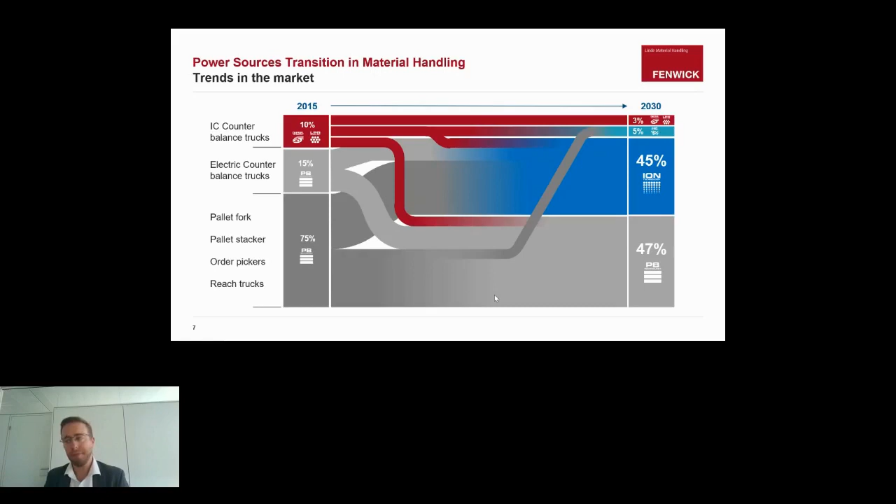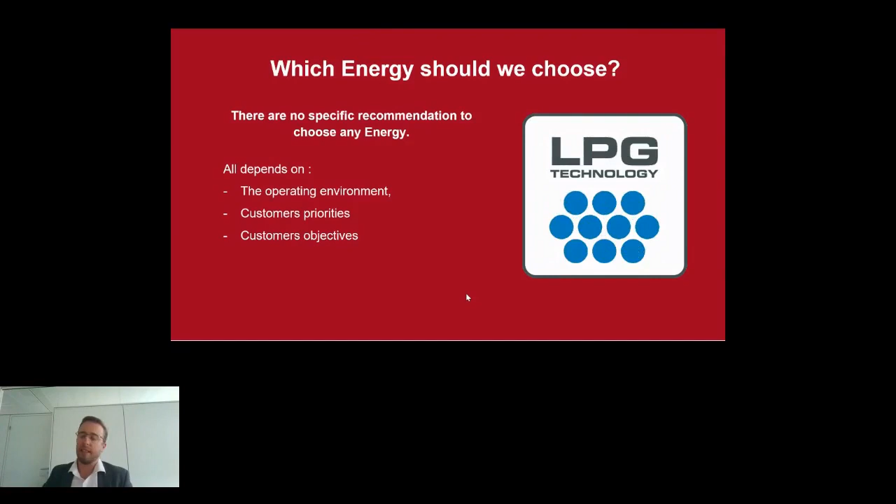Before we go into the details, which energy should we choose? This is going to be the whole trend of this presentation. We need to understand there is not one single solution to answer the demands of customers. There are multiple factors you need to understand, and that way you'll be able to choose the energy that suits best the application.

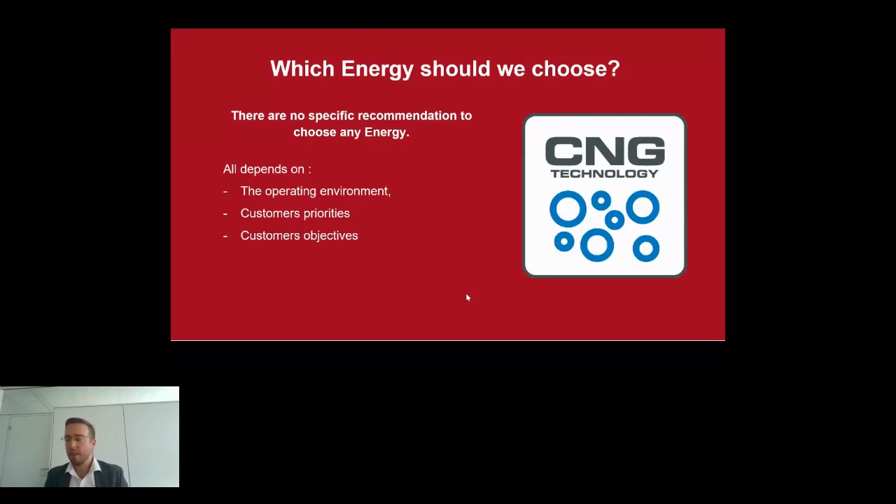So there's the environment. I touched on that quickly, having electricity available as a solution, should I go electric? But there are also other priorities we need to understand, such as, do I want to reduce my carbon footprint, or does the energy need to be as cheap as possible? These are other factors we need to consider.

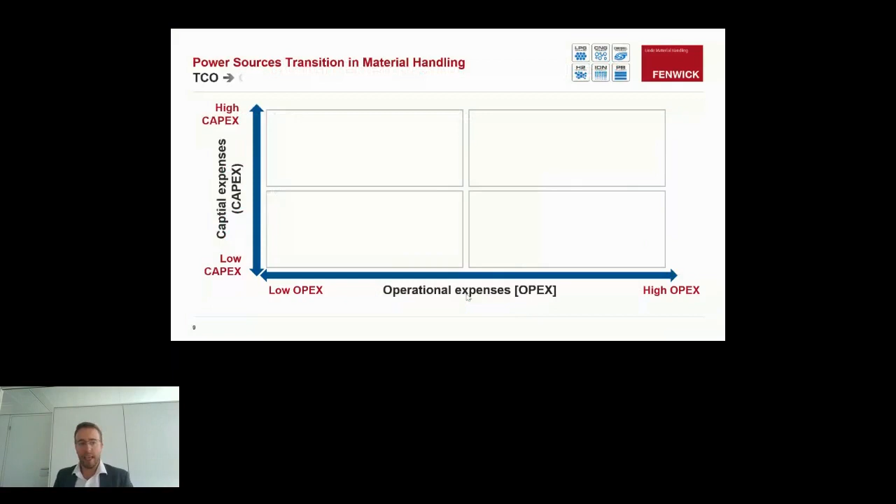I'd like to give you an overview of the different opportunities and drawbacks of each energy, based on customer priorities and objectives. First thing a customer normally looks at is money - price of running the trucks, or price of investing in the capital. Running costs are operation expenses, so OPEX. You'll also find the capital invested, so the price of the trucks, the price of investment in the grid, and that will be your CapEx. Obviously, the target is to go for the cheapest on both scenarios, so you want to be in this little box down here on the left-hand side.

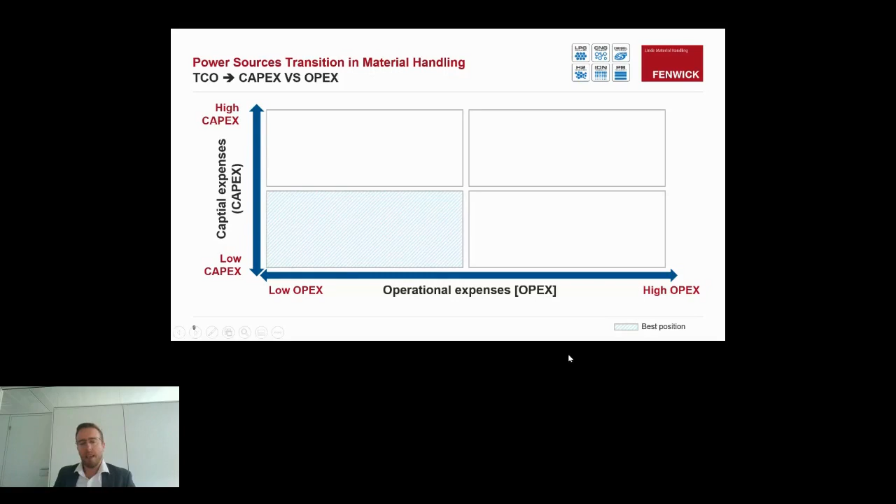We'll realize that IC trucks, if you look at LPG or diesel trucks, they are very low on CapEx, which is a great benefit. Unfortunately, the operating costs, especially when the price of LPG and diesel are going through the roof at the moment, you'll realize the operating costs are very high.

That's where today you'll find a transition towards lead acid is slightly better. The fact that we've got a nice grid in France makes the lead technology not much more expensive than an IC solution. Lithium-ion is slightly more expensive on the CapEx side, but with a low operating cost because you have a better throughput of these batteries - the batteries are giving back just as much energy as it would be covering in the first place.

Then you have another technology called H2, hydrogen. Hydrogen, for the moment - this could change in the future, but I don't think there will be a big change in a short time - requires a very high CapEx, a very high initial investment. We'll talk about the reason why a little further on. You need to understand the charging capacity - bringing hydrogen to the truck is very expensive compared to just bringing electricity to the truck.

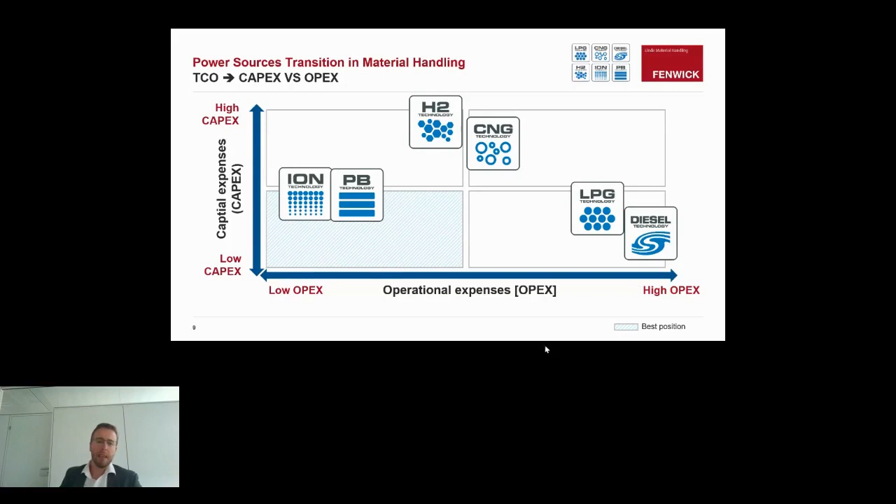If we look at another key factor, on top of the solution is mainly: is my energy cheap, but maybe is my energy very high in CO2 emissions? This is a trend that's been looked into very closely for the last three years. Again, we want to be on the bottom left - cheap energy with very low CO2 emissions.

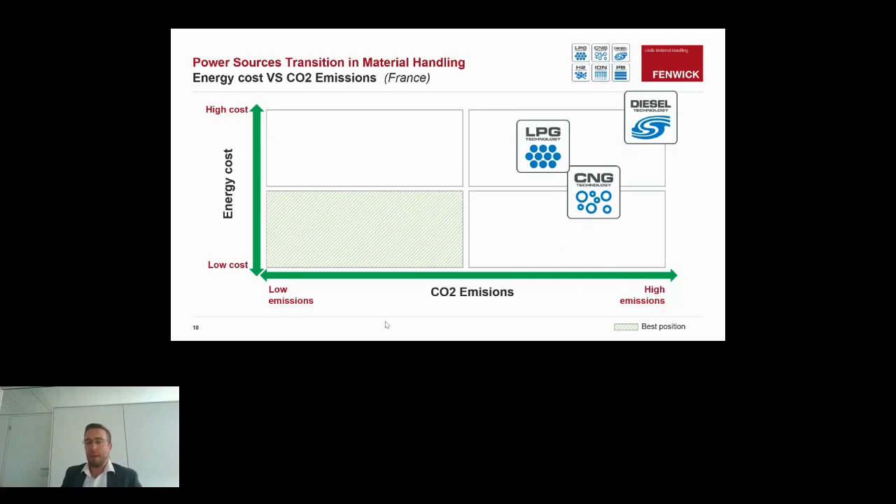The other consideration is that choosing to go towards IC solutions is maybe not the right one at the moment, and that's actually one of the big reasons why IC is losing interest - mainly because diesel and LPG are very expensive and have very high CO2 emissions.

Unlike solutions such as lead acid, which - at least in France - electricity is relatively cheap, and lithium-ion is even cheaper. With lower CO2 emissions, because lithium-ion has lower CO2 emissions compared to lead acid - you've got a better throughput, you're consuming less electricity. So you've got lower energy cost, but less electricity consumed means less CO2 emissions as well. That's also a nice advantage.

H2 is a bit of a difficult situation to place correctly today. The energy cost of H2 at the moment is very high, but this will be changing in the near future, we believe, with the investments at the moment from the EU, and I see this all over the world - H2 will become a molecule which is going to be available as from 2024, 2025. So we can see that H2 could come into a closer situation, at least at the same price as LPG, maybe even cheaper.

We've tried to be quite optimistic here and believe that the energy cost could actually become cheaper than LPG. The CO2 emissions all depend on where the H2 comes from. If it's from renewable energies, it can have a net CO2 impact of zero. However, if it continues to come from gray solutions such as methane, then you can have CO2 emissions at a rate as high as LPG. So that's the reason why, for the moment, we put it in an intermediate solution - not saying it's perfect. Today, if you want to go for something that's green, you need to go for green hydrogen as well, from green solutions.

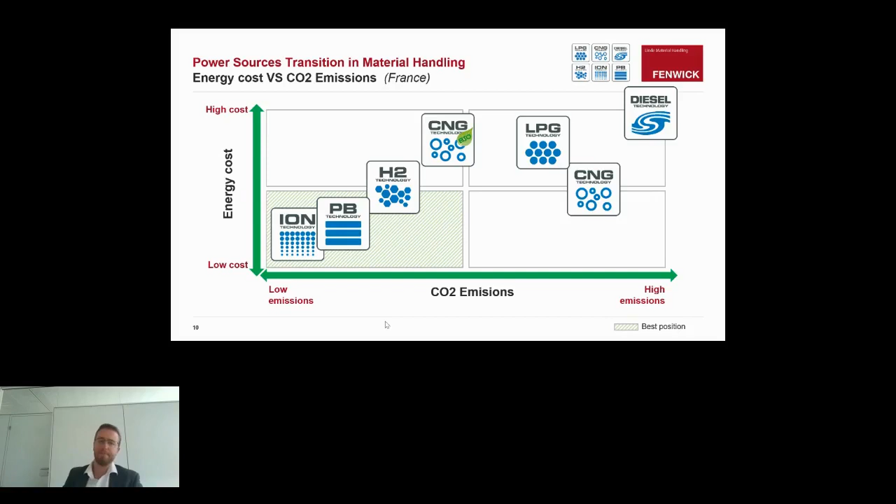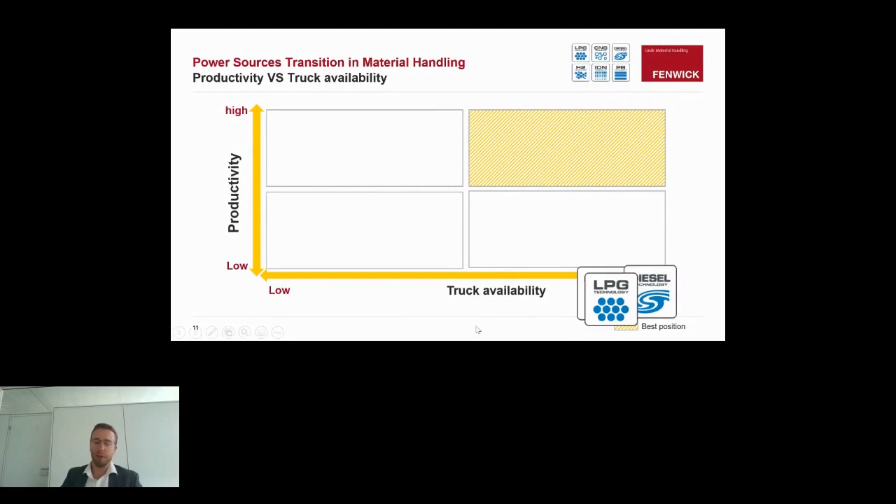Now the last one, very often - and that's where I think IC found all its benefits - is productivity and truck availability. We want powerful trucks that can lift heavy loads, pull heavy trailers, and be always available. That means quickly charged, always available energy to keep our trucks up and running. That's where IC was the perfect solution. You'll realize that basically 5 minutes and the truck is full again, and you can continue running for the next 5 to 8 hours without any problems.

Unfortunately, if you're going towards lead acid, that was very often a big issue. For the bigger trucks, we used to not be able to offer electric solutions on the most powerful trucks. You also find that a lead acid battery takes more or less 8 hours to charge at best. So today you need to find a solution - 5 minutes, 8 hours, there's a big problem in the middle.

Lithium-ion is better because it can be charged in roughly 2 hours, depending on the size of the charger and the different lithium-ion type - but let's say give or take 2 hours. As far as productivity goes, we're able to get a truck which is just as efficient in lithium-ion as in lead acid, or in IC trucks. So that's where today you find all the benefits.

If you want to try and improve the uptime, you can actually still go towards H2. You can get really close to IC vehicles. I didn't say it's identical to IC, because with an IC vehicle you could have 6 hours of autonomy. You might need to refuel your truck twice as much in H2 compared to IC - mainly because we need to find room to install a sufficient amount of H2 on the vehicle. But the charging, the reloading of the battery or the fuel cell, will last approximately the same time - roughly 10 minutes.

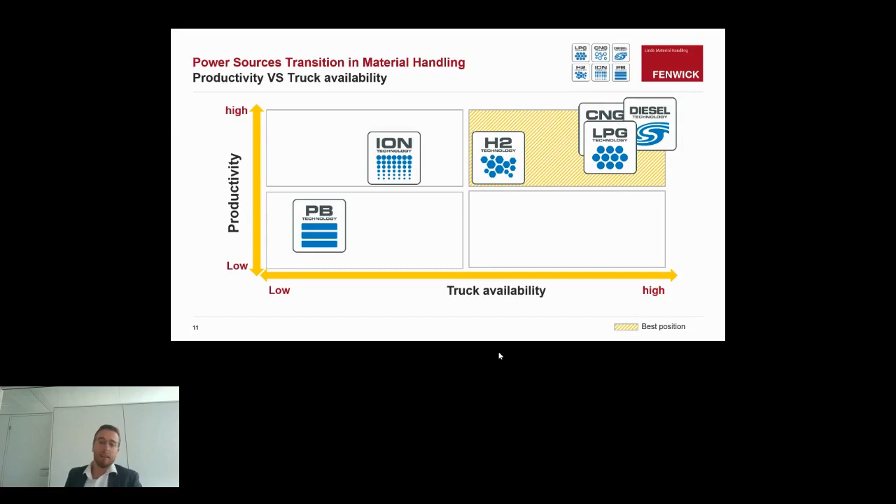I'd like to do a little focus, because this is where I'm seeing the new trends on two different technologies - one you are taking on and is already taking on steam, which is lithium-ion, and one that will take on, I guess in the next few years, which is H2. Let's talk a little more about this H2 technology, starting with: how does it work?

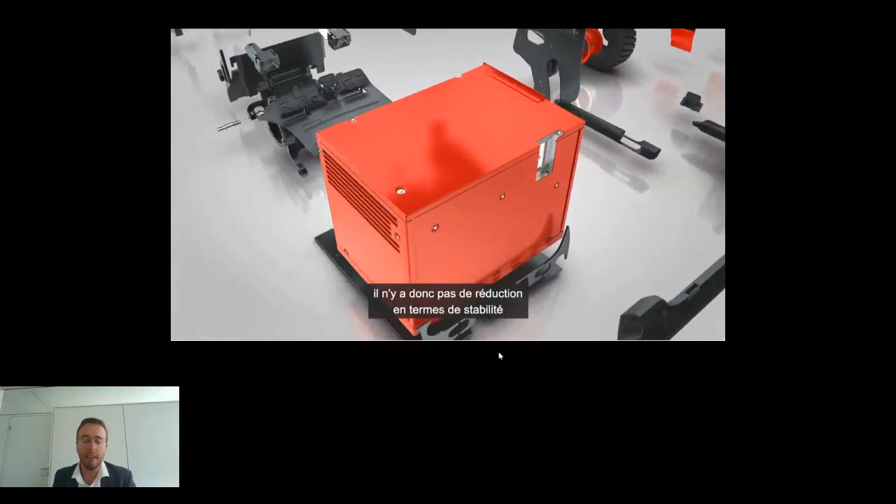So we'll be talking about a fuel cell solution. What is a fuel cell? We start with a normal electric truck, and what we're doing is replacing the lead acid battery with a fuel cell. So the core of the truck, which is the battery - you can see this red box here - is no longer a lead acid battery, but a fuel cell.

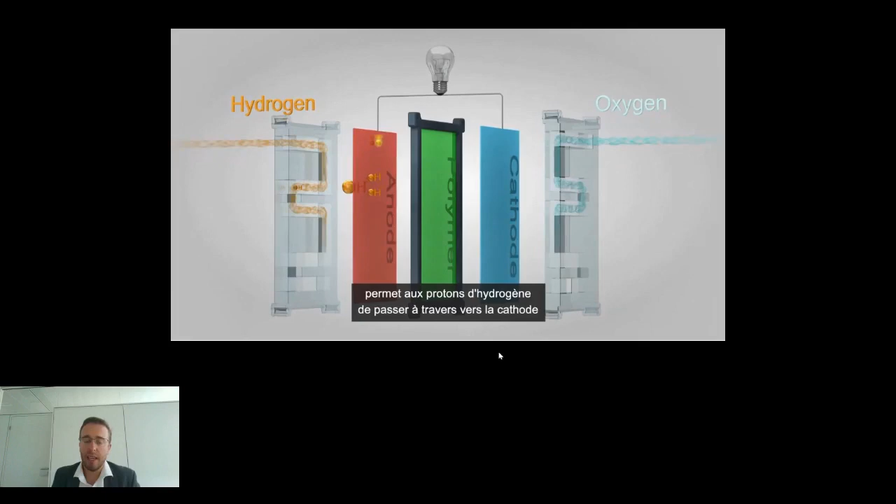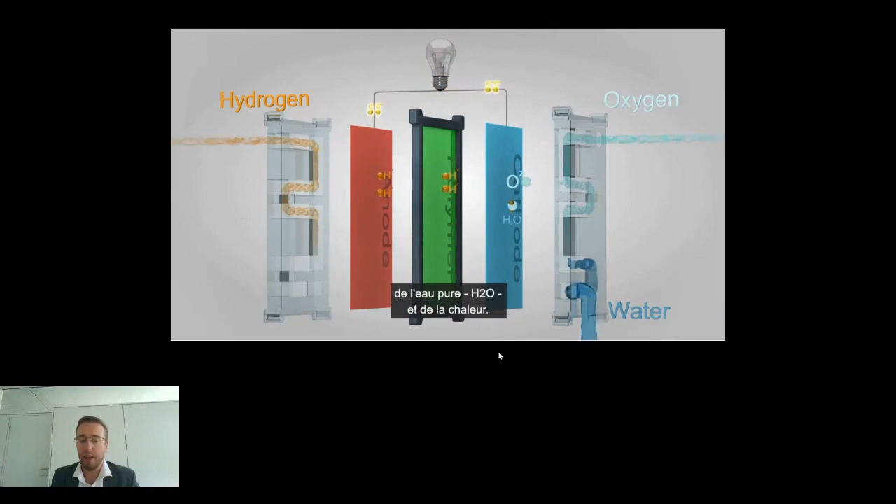Inside a fuel cell you will find some stacks. Inside each of these stacks there's an anode and a cathode. You'll be injecting hydrogen towards the anode, and through the anode towards the cathode, this H2 reacts to move towards the oxygen on the cathode. That's basically sucking the H2 towards the O2. During this reaction, an electron is pulled off the H cell, and this is what produces electricity. Once it arrives at the cathode, the hydrogen and oxygen react together - H2 and O2 means it becomes water. This is basically, in a very short nutshell, how we produce electricity in an H2 fuel cell.

This electricity can be used in two manners: it's being used directly by the vehicle, or it's going to be stored for later use in a lead acid battery or a lithium-ion battery, to be used during peak power times. Once that is up and running, you actually have a standard electric truck.

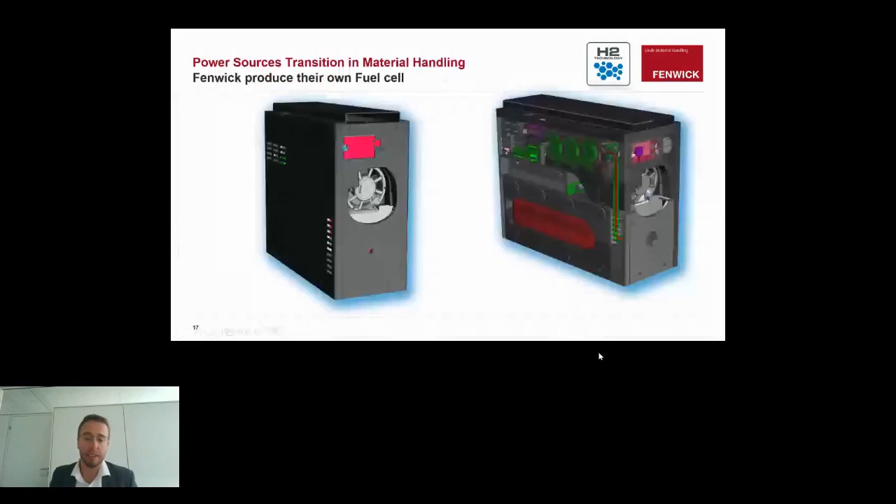Even if the French market was interested in going fuel cell, you need to understand that material handling is already quite advanced on hydrogen. If you want to go hydrogen, for example, our brand has already got 80% of their product range in fuel cell. And I'd like to also self-promote the fact that we're actually producing our own fuel cell in-house at the moment, only for 24-volt trucks, but we can also offer fuel cell solutions.

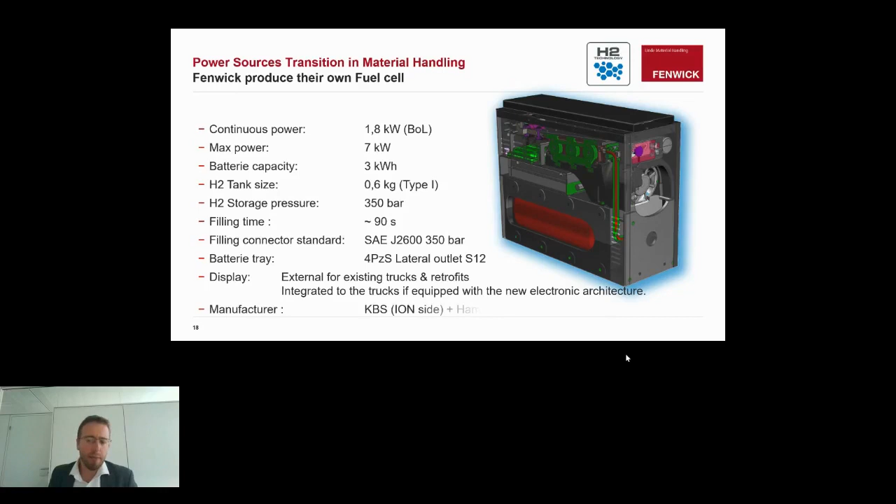Why would you go fuel cell in the future? Well, should you go fuel cell, it would depend, maybe, on the application. Maybe it's better for heavy goods, maybe it's good for logistics centers, or is it any better for industry? Well, in reality, we don't really care about the application.

Why do you want to go with these big application use rates? Because if you were going for smaller solutions, you could actually stick to lead acid or lithium-ion, which would be much cheaper for both running costs and investment costs. To make it viably justified, you need to have quite a big fleet—that's why we say at least 50 to maybe 100 trucks on the same location, because you need the infrastructure for H2 in this solution, and the infrastructure for H2 is pretty high.

You will realize that outside of your building you want a storage area for H2, which is going to become an ATEX zone, so you need to consider this as well. You will be storing this with a compressor, which is going to compress at very high pressures. For the moment, material handling is sticking to the 350 bar threshold, not the 700 bar liquid solution you could see in other industries. But today, material handling is only sticking to 350 bars, which is huge already.

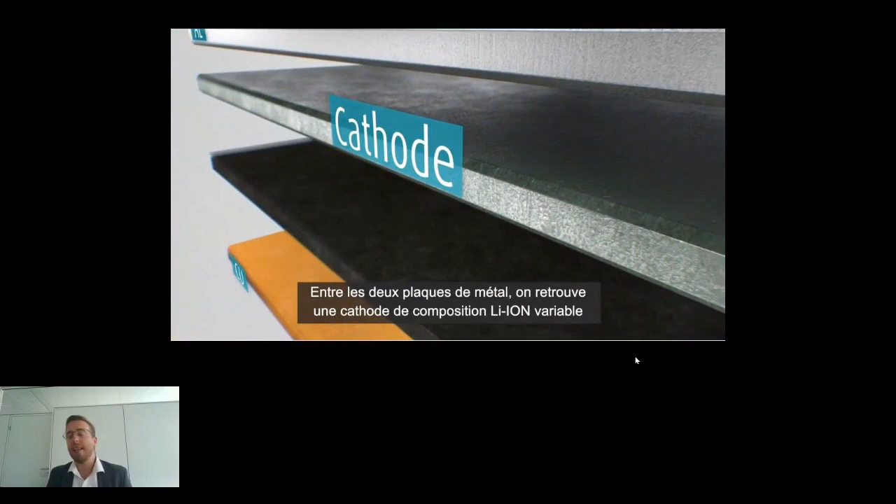The cathode is basically your lithium-ion magnet, and the anode is your sponge for lithium-ion. Around all this you'll find a little separator in the middle, and around that you have electrolyte, and it's in the electrolyte that you have the lithium-ion. So the lithium-ion in a lithium-ion battery is roughly 1%. Lithium-ion is mainly composed of everything except lithium-ion.

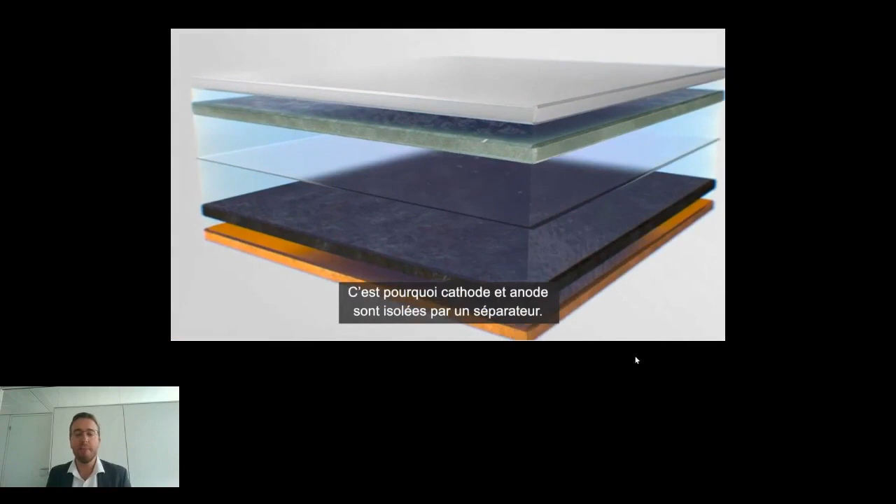What's happening is when you're charging, you're pushing the lithium towards the graphite, basically pushing the lithium-ion into this big sponge. Once the lithium-ion is completely pushed to one side, your battery is fully charged in the anode.

When the battery is discharged, your cathode, which is your magnet towards lithium-ion, that's where the lithium-ion goes. You can see there are different technologies, we're talking about phosphate, nickel, cobalt, manganese, that's mainly what this lithium-ion magnet is made out of, and that's what's actually sucking the lithium-ion through on the other side.

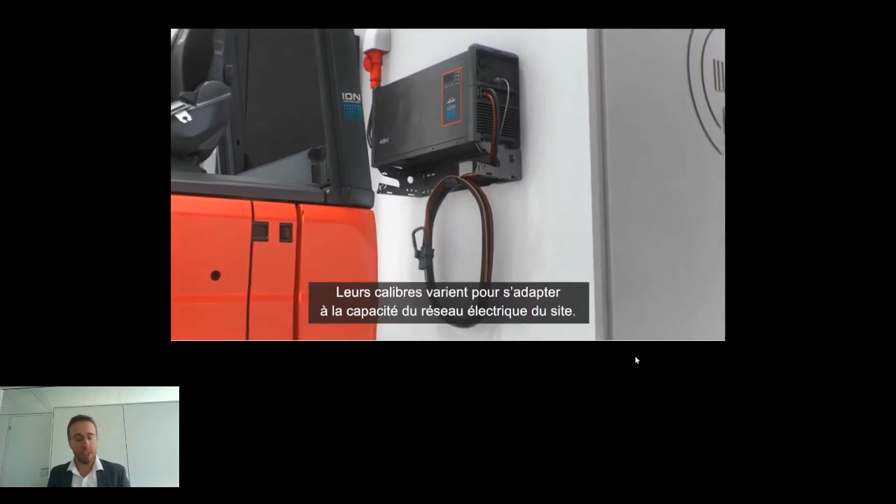When the lithium-ion is being pulled through, it takes on a little electron to push the power through. This movement can be done at any moment and switched at any time, so you can do partial charging without any problems. The only thing you need to make sure is that the battery is not fully discharged or overcharging either.

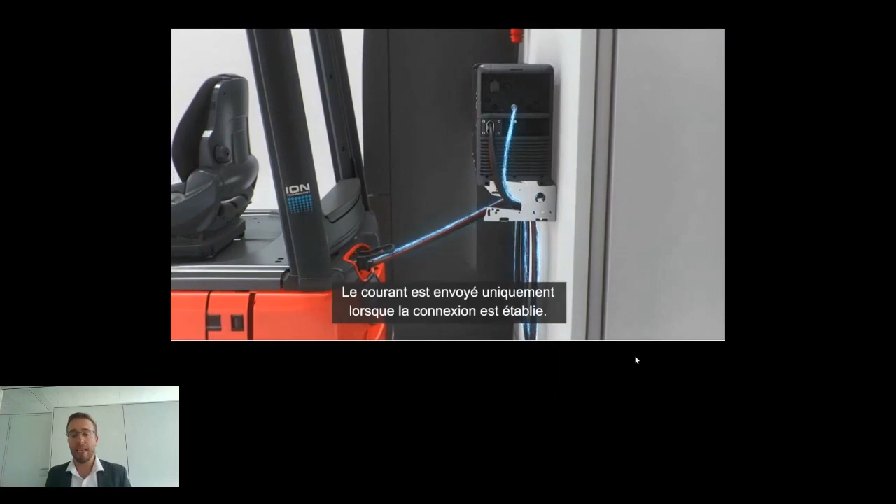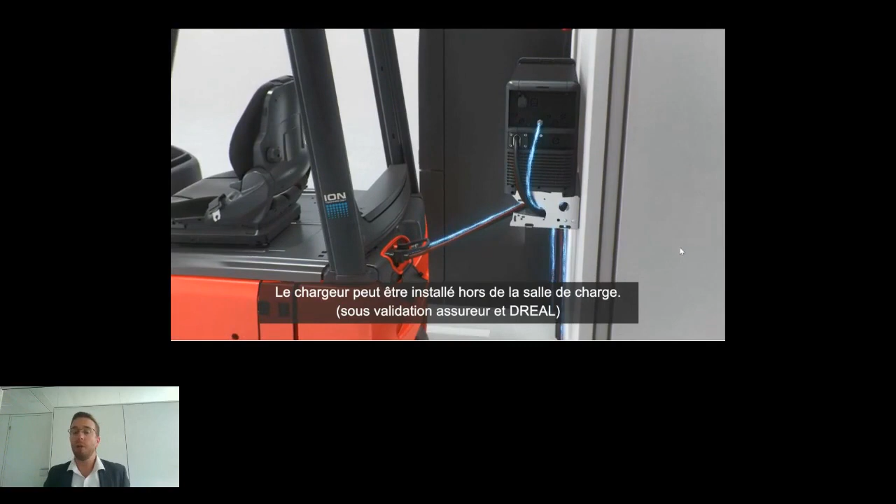That's why batteries are equipped with a BMS, battery management system, which is always connected and talking to both the truck and the charger. So you've got communication between the charger and the battery, which you wouldn't have on a standard lead acid. It's something much more advanced than what you'd have on your mobile phone, for example, just to improve safety, because we've got bigger batteries and we're making sure we'll never have a problem.

This is great about this solution. As I said, you can do partial charging and also very fast charging, because these solutions emit very little heat. So the opportunity for you is basically to install the chargers where the trucks are not being used and where the operator is going to stop.

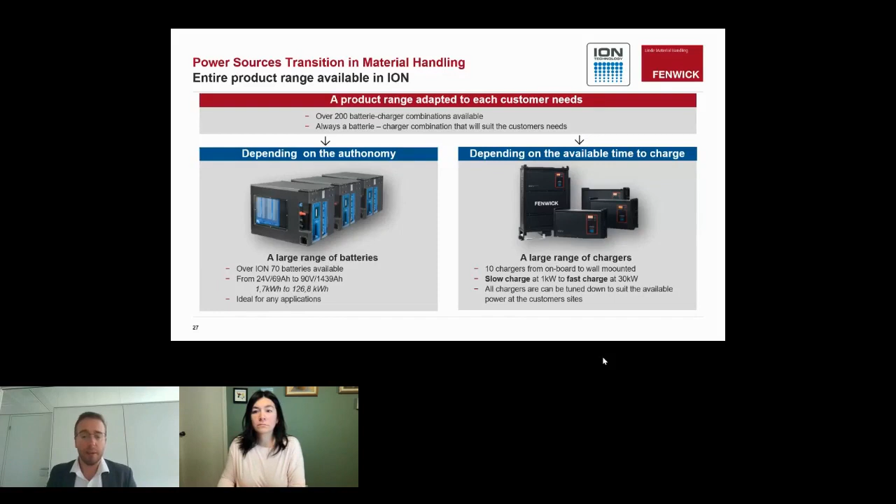So why would you choose lithium-ion? You would choose it for its efficiency, because you have a solution which is emitting very little energy and consuming much less energy. So you're actually reducing your power bill.

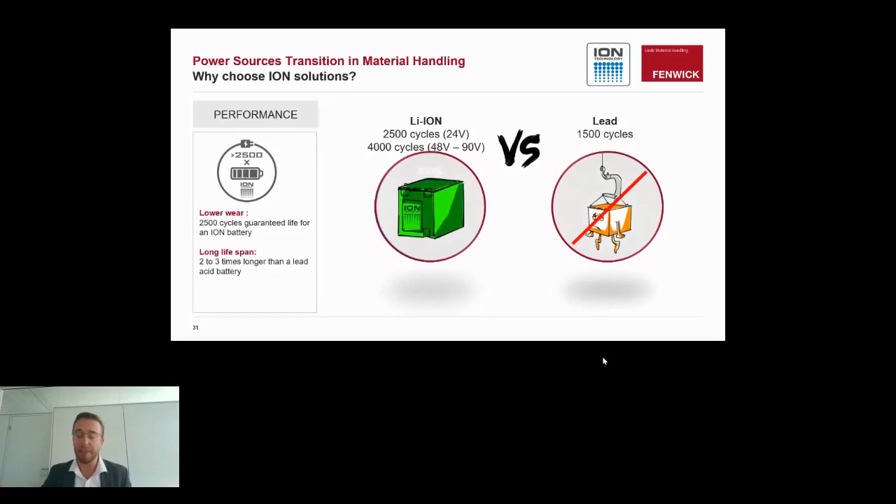You also have a high performance battery with a very long lifetime. Your battery will last 2 to 3 times the life of a standard lead acid battery, which helps get the price of lithium-ion to the same price as lead acid if you consider the whole lifespan of the battery.

Very often in lead acid, once the battery is discharged, you can't really continue - you have to wait 8 hours. On lithium-ion, a 10-minute charge gives you at least an hour of more work to continue, and you will not damage your battery doing this kind of opportunity charging, which we sometimes also see in lead acid.

On big applications, you don't have to worry about battery changes, so no risk of dropping the batteries or injuring personnel doing the changing. Batteries in warehouse products are something between 150 and 600 kilos. You've got rollers and nice implements to change them, but it's still moving these big masses by hand, so accidents can occur.

That's the reason why going towards lithium-ion is very often also a solution to these issues. And the last one is comfort - you don't need to move these big masses, and you'll also find there are no emissions of hydrogen, so you don't need charging rooms, no risk for operators, and you've got a battery with zero maintenance.

So if you put together the improvement in efficiency, performance, flexibility and comfort, this is the reason why we've seen, for a few years already, a transition in material handling with a lot of people switching to lithium-ion.

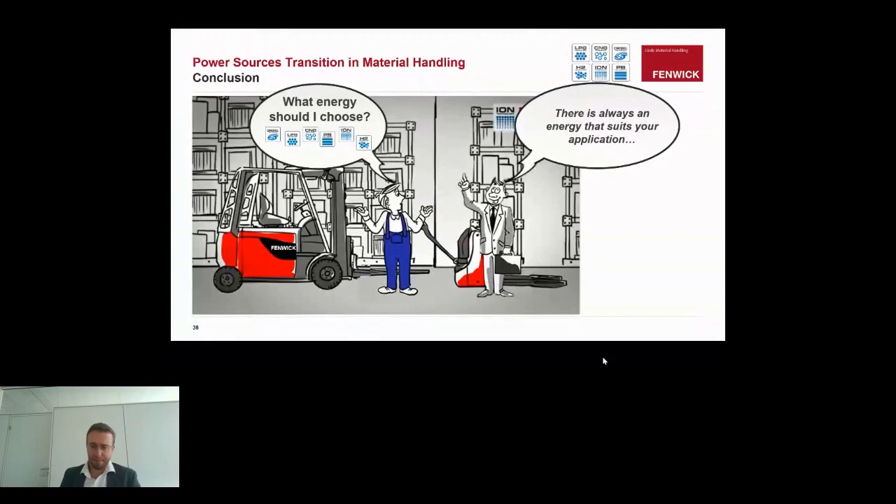On this, I think there are some specialists - we are some specialists there to help. If you don't know which energy you need to choose, ask some people. We're there to help, and there are other people as well. Just make sure that the battery you choose is in line with your application and your needs. You got enough energy in your batteries, both lead acid and lithium-ion, I don't care. The question is making sure that if you're especially switching from IC back to electric, go for the battery you would need, with the autonomy and chargings you would actually need.

If you want to compare, how much are your savings? This is something we can actually do, making sure to give you the savings you would be making, and your true operating costs depending on the different energies you would choose. And if you want to understand your return on investment and see how much you would invest, we can also give you some guidelines.

So I'd say I don't have a perfect solution, but today we've never had so many choices in the market. There are some energies being phased out - not saying they're already disappearing - but we've got some energies being phased out, and some new solutions coming through to really push forward, such as H2 and hydrogen today.

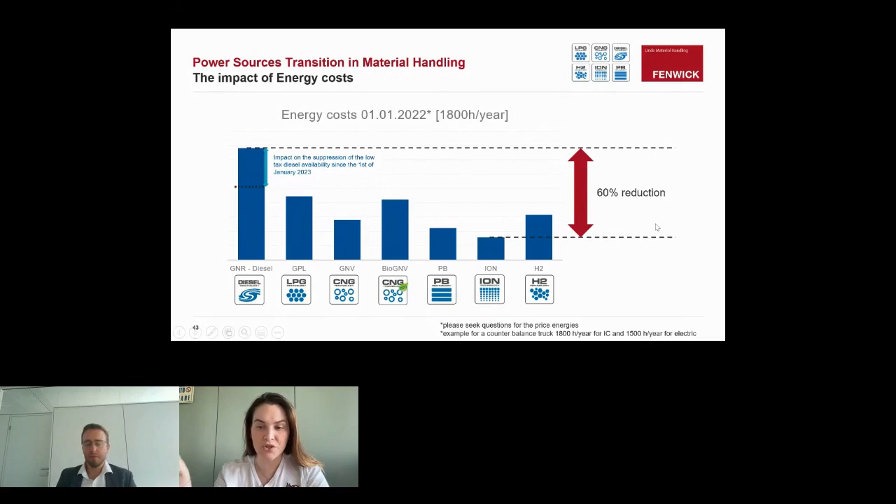20 minutes, basically. Sure. So the CO2 emissions, that's something as well - that's great, it's my next slide. So let me get these logos up.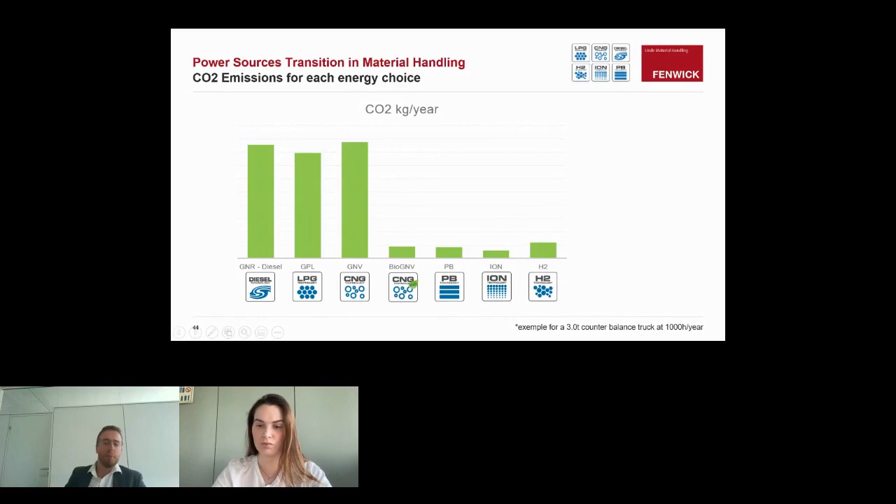I just would like to show this as well and give you a little more facts and figures - when financially you should go from diesel to electric to lithium ion. And in the end, it depends on what your use rate is for your trucks.

Today, if you've got an IC truck and want to go towards lithium ion or lead acid, or basically electric - any truck, from a pallet stacker to a 3 or maybe 8 ton truck - the number of hours are more or less always the same.

So it's true that if you have a very low use of your truck, you'll find a very slow return on investment. As soon as you start increasing the number of hours the truck will actually do, you will find that your return on investment will be quicker, going down to roughly 5 years in most scenarios.

If you continue increasing the number of hours, you'll be switching to a two battery solution. So you're going to have a big gap in your initial investment, increasing by at least 5, maybe 10,000 euros to go for 2 lead acid batteries, or a bigger lithium-ion battery. But even still, your operating costs in IC will just go higher, and your return on investment will stay very close. In the end, the more you use a truck, the quicker your return on investment could be.